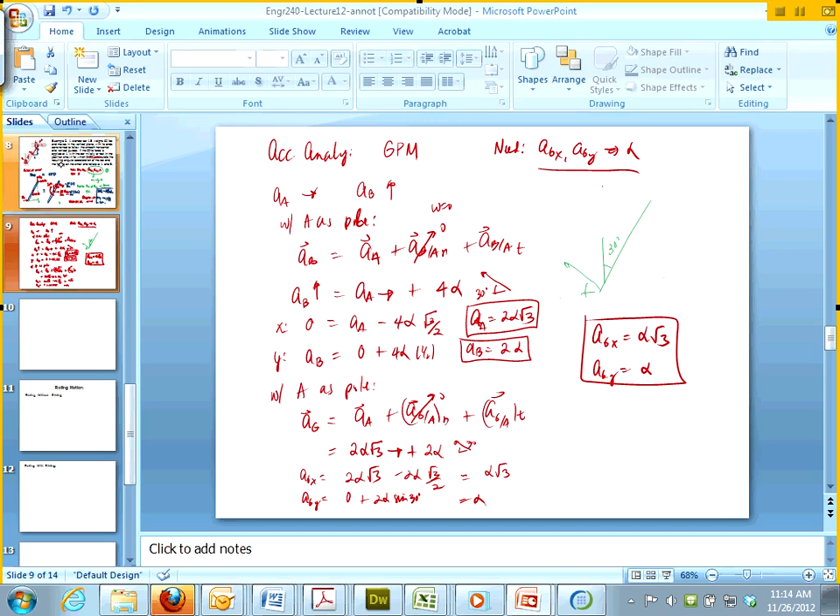Okay, let's see. So let's look at the last problem that we didn't quite finish last time. Seems like from another eon. So we had this innocent looking problem, right? A single bar in general plane motion. I don't think it can be any simpler than this. We are given its weight, that it moves in the vertical plane and its ends are constrained to follow horizontal and vertical guides. So A is constrained to move along the horizontal and B is constrained to move along

the vertical. And there's a 30-pound force that is applied at the position shown where it's initially at rest, and theta equals 30 degrees, and we're asked to calculate the resulting angular acceleration at this position due to the forces applied, as well as the forces on the small end rollers A and B. Since the problem asks us to find an acceleration, this has to be a chapter 16 problem. We look at the free body diagram and effective force diagram.

By the way, if you look at the book, the way they analyze the problems, they right away start with kinematics to either, number 1, find all the kinematic variables if you can, or number 2, reduce the number of kinematic variables by relating them to each other. I don't like doing that approach because I would like you to see first how much kinematic analysis you need in order to make the free body diagram happy. Does that make sense?

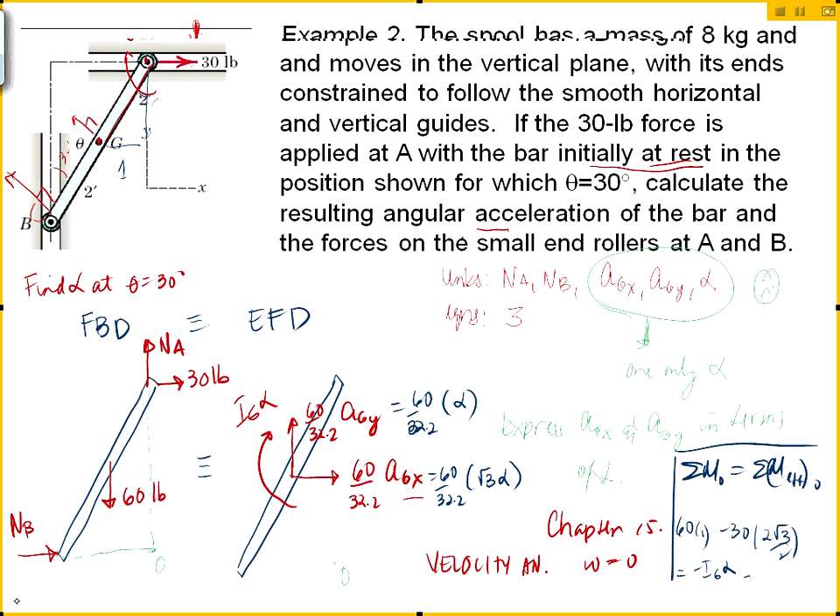Okay. In chapter 15, chapter 16, D'Alembert's principle, FBD equals EFD, is very similar to Newton's second law, but on the EFD you have 2 or 3 things, right? So here it's 2: one mass times acceleration of the center of mass, AG, and one IG alpha. It has to always be with respect to G. Is that your question? Okay. Yes, it has to be MAG. It has to be the acceleration of the center of mass, not any other point in the system. And it has to be an I relative to G multiplied by alpha. That's in case of a mass, right?

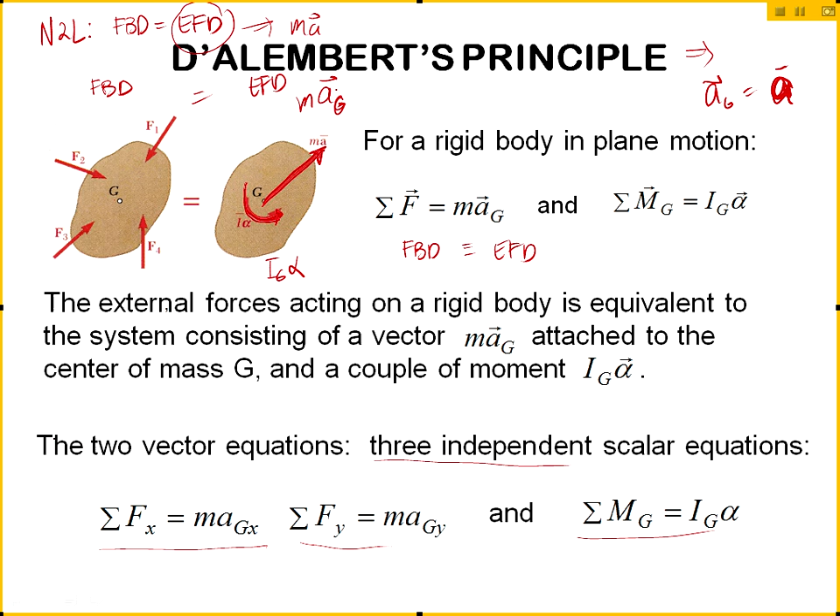No, if the center of mass is not moving, then AG is 0. Therefore, it's just an IG alpha. So if it's in centroidal rotation, meaning it's rotating about the center of mass, which means that the center of mass is not moving, which means that AG is 0. Okay, and that's one of the problems that you looked at, right? So if the object is rotating about the center of mass and it is not moving, A sub G is 0, so you're just going to have IG alpha. Okay?

Exactly. So in this example here, if you look at that pulley, the center of mass of the pulley is not moving, right? Because it's rotating about the center of mass. That's why you don't see a mass times AG for the pulley. Is that okay? But this one is actually a case when the center of mass is moving, right? G can move up. So in addition to the IG alpha, you have the mass times AG.

Here, in the problem we're looking at, the center of mass can actually move, right? Yes, G can translate, and we don't know the exact direction of its motion. It can move both along the X and the Y direction. That's why instead of showing it as AG with unknown magnitude and unknown direction, I represented AG as 2 unknown components, one along X and one along Y. Is that okay? So I'm going to have to redo the free body diagram.

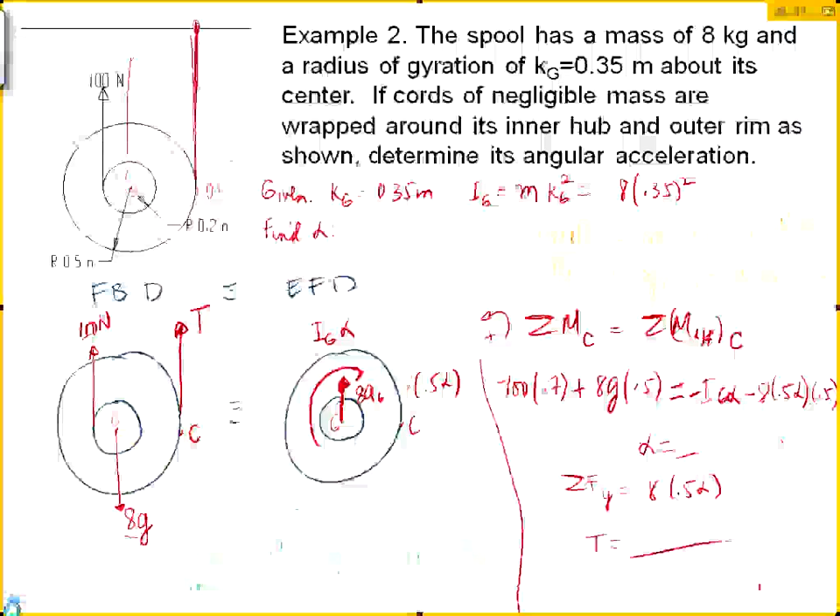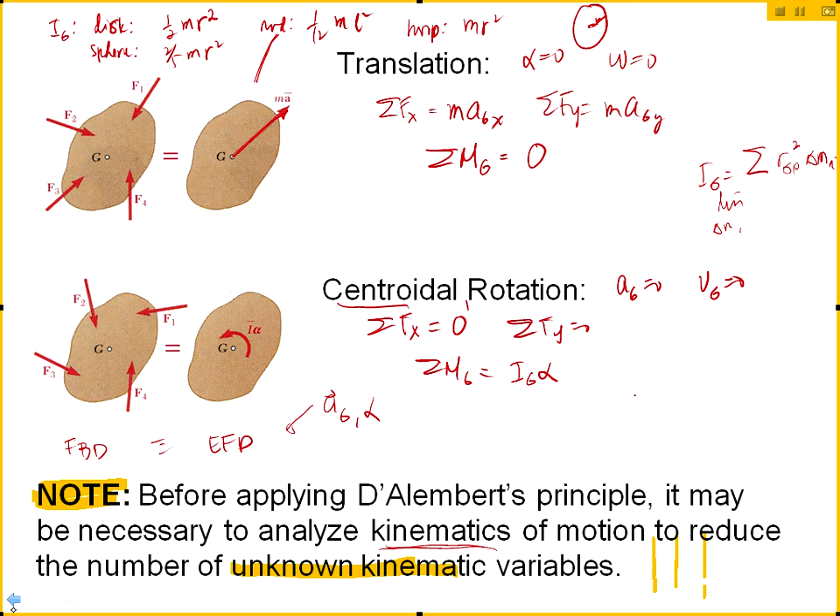This is the time to conclude that in order to make the system happy, if you remember my word of caution before, my triple exclamation point: before applying D'Alembert's principle, it may be necessary to reduce the number of unknown kinematic variables on the right side of the equation by using kinematic analysis. So you only use kinematic analysis on the acceleration side, because only accelerations are kinematic variables. The unknowns on the left side are forces, and forces are not kinematic variables.

It's not constant. What do you mean what is not constant? Here, nothing is constant. AGX is not a constant, AGY is not a constant, NA is not a constant, NB is not a constant. This entire problem is only for 30 degrees here. At some other angle, all their values will be different. The only thing that's given here is that omega is still 0. But that's going to change eventually because of the angular acceleration that we expect to be non-zero.

So of all of these 5 unknowns, the triple exclamation points suggest that what? We need to reduce the number of unknowns by kinematic analysis. The only way we can do this is by reducing the number of unknowns on the right side. So the question now is, how many kinematic variables can I afford to have on the right side in order to make this system happy? It's alpha, right? Well, I'm not solving for anything. I'm simply trying to make this system happy.

Yeah, so you relate them. Okay, but the question is, how many kinematic variables do we have here as unknowns? 3, right? These 3 are kinematic variables. So how many kinematic variables can I afford to be unknown in this system and still have a happy system?

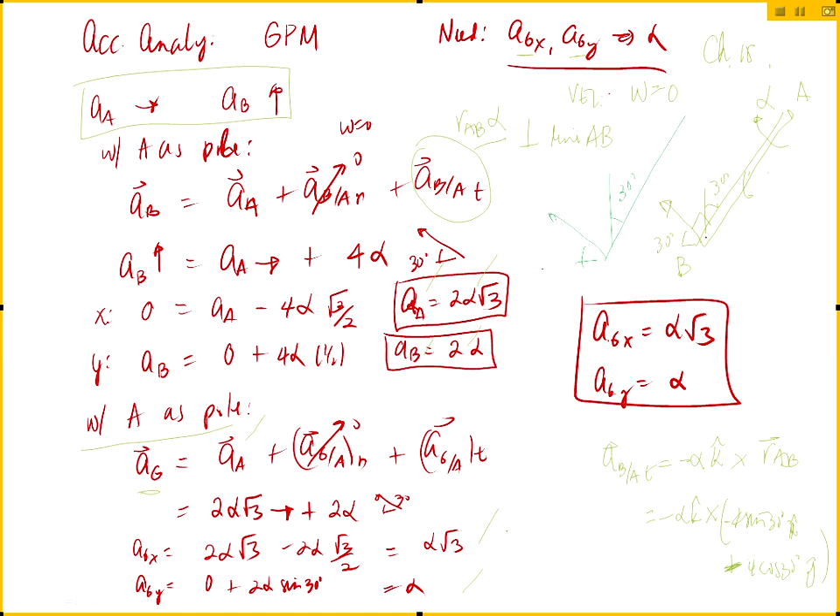Yes. So after expressing AA in terms of alpha, I now apply acceleration analysis going to G, because ultimately it's G that I'm interested in. So AG is equal to AA plus acceleration of G relative to A. The normal again is 0, and the tangential would just be what? Instead of having 4, it's just 2, right? Because you're going from A to G, and G is halfway along the length of the bar. And I do AGX and AGY, and we got these results here. AGX is positive alpha square root of 3, and AGY equals alpha. And those are the results that I'm going to substitute in here.

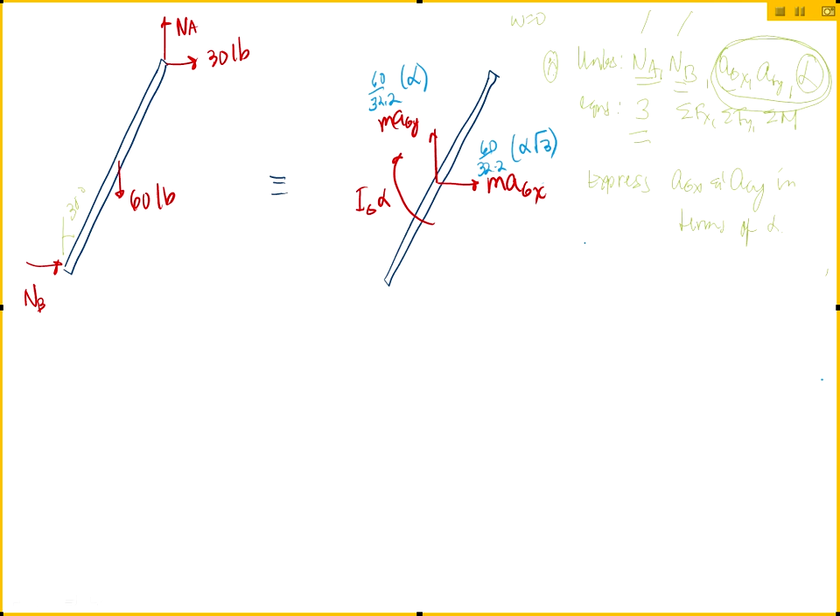Okay, so this is going to be mass. What is the mass of the bar? It's 60 over 32.2. And AGY is just numerically equal to alpha, right? And this is 60 over 32.2 again for the mass. And AGX was how much? Alpha square root of 3. So this thing now is being replaced by the blue term, which is now in terms of alpha. This is also replaced by the blue term in terms of alpha. Now, with AGX and AGY expressed in terms of alpha, this is now a happy system, right? And this is the time when I start my summation equations.

And if I remember correctly, Surush suggested, what did you suggest, Surush? Do you remember? Yes. So some of you would just go summation forces X, summation forces Y, and then summation moments about the center of mass, which is probably what the book would have done also. It's really a happy system now, 3 equations and 3 unknowns. You can set up all those 3 equations and solve them simultaneously. But it's much better if you can solve for one of them independently of the others. So if you can eliminate 2 of the 3 unknowns in an equation, use that equation.

So he was suggesting we can eliminate NA and NB simultaneously by summing up moments about the point where they intersect, because their moments about that point will be 0. So the summation of moments on the left side about point O is equal to the summation of effective moments about the same point. It's very important when you're summing moments on the left side, it has to be exactly about the same point on the right side. And does everyone understand why I sum moments about point O even though it's outside the bar?

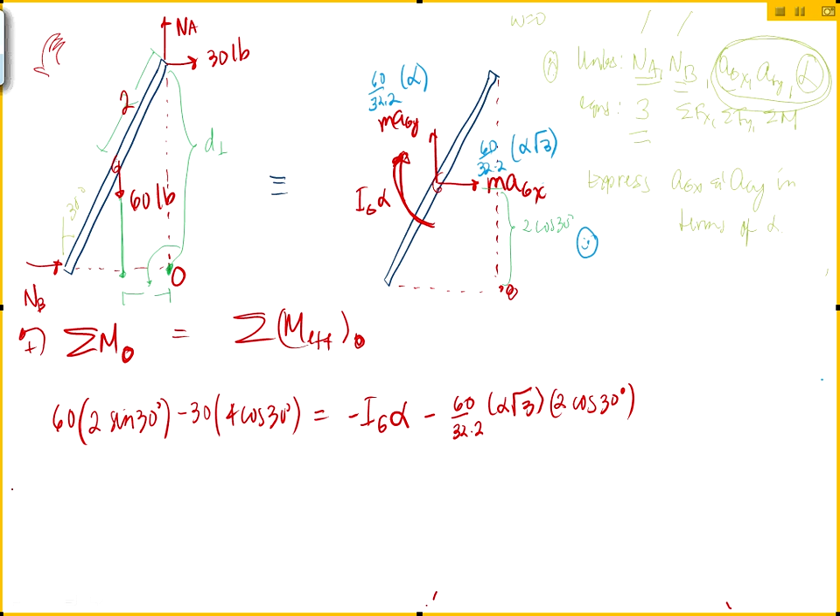And the maGy will also be minus, right? Okay, minus the effective force, 60 over 32.2 multiplied by alpha. Again, that's just the effective force. We need to turn that into a moment or a torque by multiplying that by a perpendicular distance. Which perpendicular distance would that be? 2 what? Sine 30 degrees. Everyone okay with that?

And of course, I didn't substitute it here. We should know what IG is for a slender bar. It's going to be 1 over 12 multiplied by its mass, 60 over 32.2, multiplied by the square of its length. Yes? I sub G is equal to 1 over 12 M L squared for a slender rod. And as you can see in this equation, there's only one unknown, so you can solve for alpha.

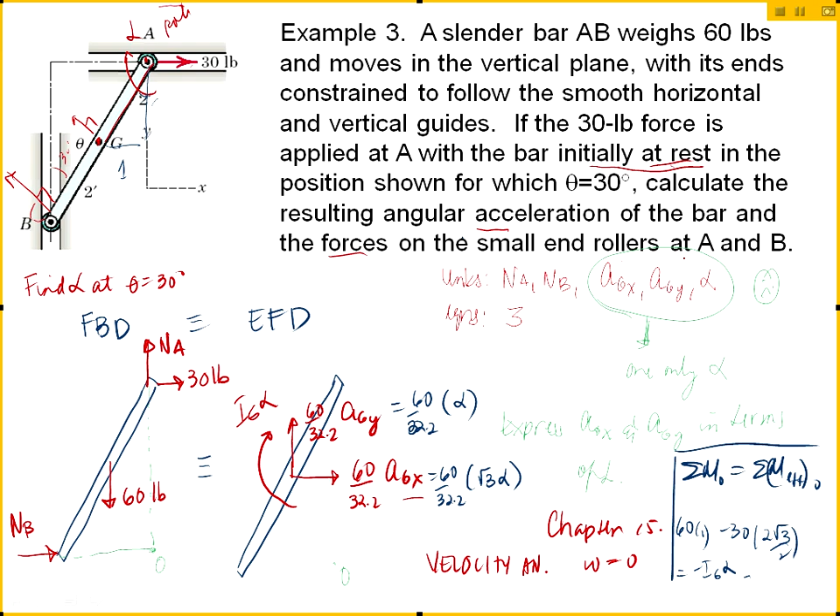Okay? Once you know alpha, we're not quite done yet because, if you remember, it's also asking us to find the forces at the rollers A and B. So we need to find NA and NB. So how would I find NA and NB?

Okay, I'm going to do summation of forces along X equals summation of effective forces along X. Okay, so let's do that. What are the forces along X? NB is one of them, plus 30. Must be equal to, those are the only two forces, right? Must be equal to, on the right side, what's the only effective force? It's just the m a_Gx, right? 60 over 32.2 multiplied by alpha square root of 3. But this guy here is already known, right? Which means that this summation of forces along X will actually lead us to finding NB.

Okay? Similarly, we want to find NA, we sum forces along Y equals the summation of effective forces along Y. Y forces, we're going to have an NA going upward, 60 going downwards, so it's a minus 60. And on the right side, the only effective force is the m a_Gy, 60 over 32.2 multiplied by alpha. We already know alpha, which means that we'll be able to solve for it. 60 is vertical. Okay?

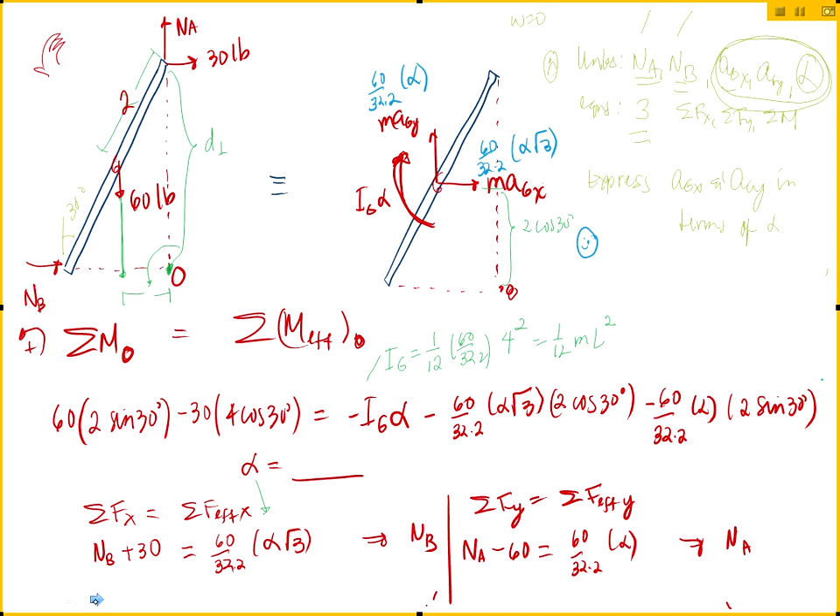Rolling motion. I think there's a similar problem on the homework, but rolling motion is really a special kind of general plane motion. If you are rolling without sliding, what's the relationship between velocity and angular velocity? So if I have an object, and the center of mass is G, and if it's rolling about a stationary ground, the velocity of the ground is 0, so the velocity of the point of tangency is 0. If it's not sliding relative to the ground and the ground's not moving, the velocity of G would just be R, radius of the disk, multiplied by omega. In this case, it's going to be horizontal.

All right. Similarly, what can you say about the acceleration of G? We will just differentiate both sides of the equation. It will just be R alpha, and to the right, if I'm assuming that omega is clockwise. So when it's rolling without sliding, you have an exact relationship between the linear acceleration of the center of mass and the angular acceleration, assuming that it's rolling along a horizontal surface.

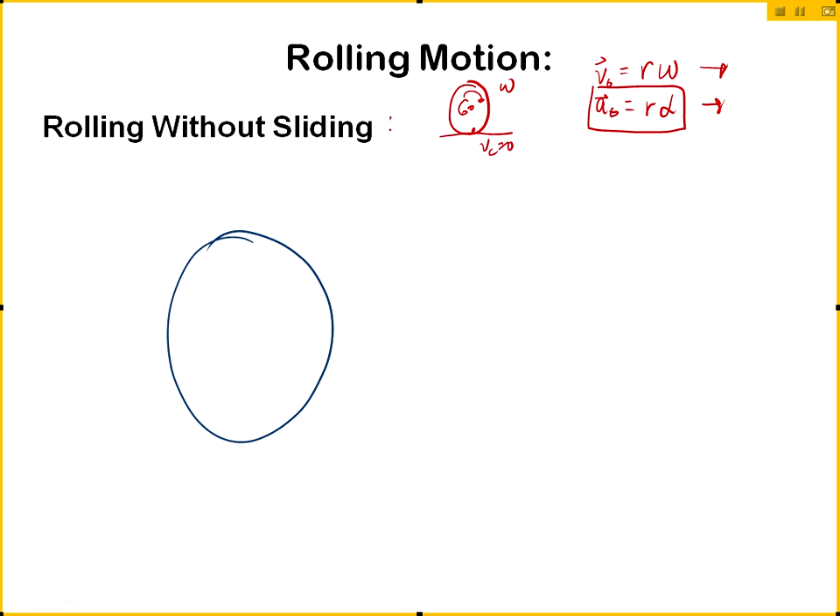So let's look at an example. Let's say that I have this yo-yo. I actually have the yo-yo with me. And let's say I pull it with a force P. Okay, so I have 3 yo-yos here. My hamburger yo-yos. So it's being pulled to the right, like this. So my question is, where is the yo-yo going? What is the resulting angular acceleration of the yo-yo? Clockwise or counterclockwise?

What is the resulting angular acceleration of the yo-yo? Clockwise or counterclockwise? How many of you say it's counterclockwise? Yeah, there's friction. How many of you say it's counterclockwise? Raise your hand. How many say it's clockwise? Nobody wants to say anything. So, by show of hands, counterclockwise is the more popular answer, right? So, the answer is clockwise. Okay.

It's not clockwise. Well, depending on you. What? What have you got to say? It's just clockwise or counterclockwise, right? Isn't that clockwise? What about when it rolls over there? But it doesn't roll over there. You just say it doesn't. So what happened? Why did you think that it's counterclockwise? You agreed with Sarush. Okay, let's blame it on Sarush. It's clearly clockwise, right? I'm not tricking you. Do you want to try? So what happened? It's not a trick.

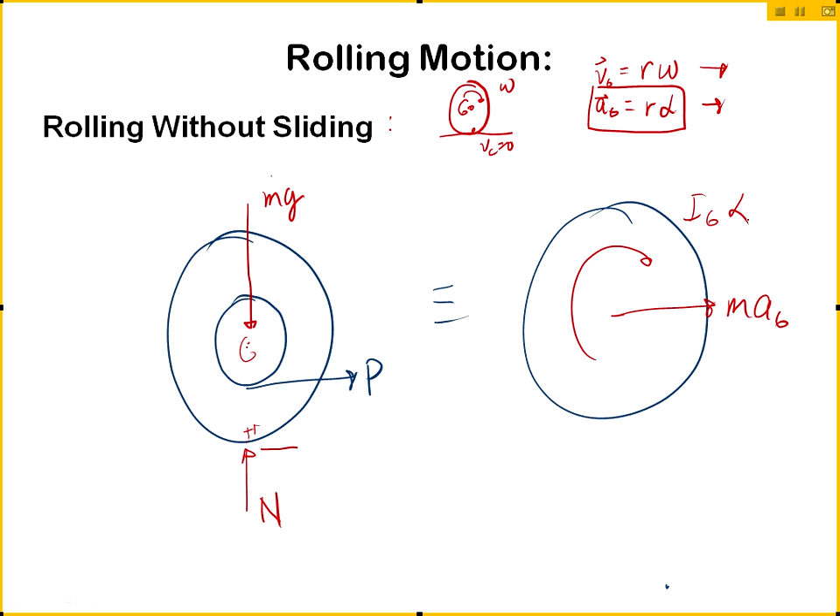We already said that the alpha is clockwise, right? And Ag is to the right. Do you agree with my right side? Yes? That I'm confident, right? That the center of mass accelerates to the right and also rotates clockwise. So this one I've established, okay? This one here, I still have a question mark. Why?

What we're concerned with is not the motion of the center of mass of the yo-yo. I agree with you, the center of mass moves to the right. But then the whole thing moves to the right? Not necessarily, because as it's moving to the right, it's also spinning clockwise. As it spins clockwise, the bottom part actually slides to the left relative to the ground, you agree? Yes? Do you see that?

If I take my fingers off, okay, so it's moving clockwise. If you focus on the spinning clockwise, isn't the friction the other way? You agree it's spinning clockwise, right? What's the direction of friction here? Left or right? No, it's right. Because this thing here is sliding to the left relative to the ground.

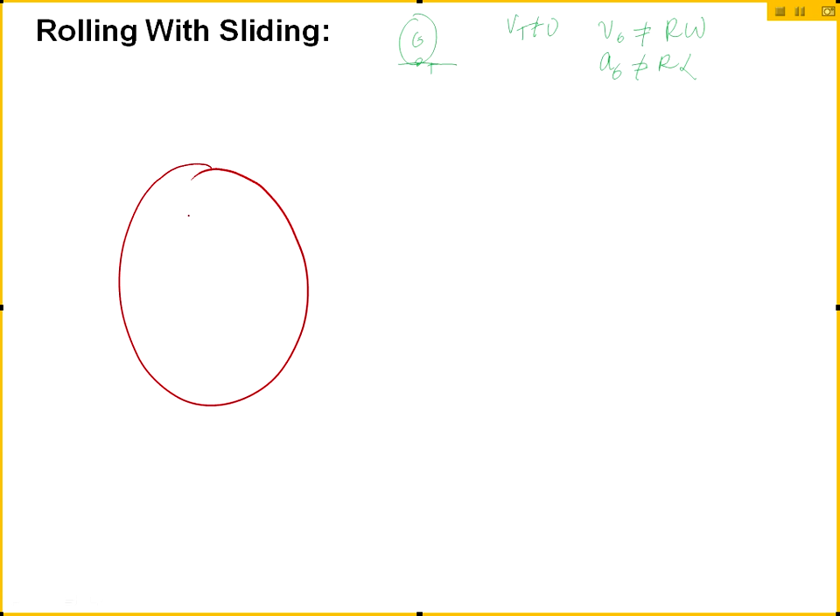Okay? So let's look at the scenario. If we have the same yo-yo, and I'm still pulling it to the right with some force P, what's going to happen now? If it's rolling with sliding, that means I'm really yanking it with a big P. If it's a small P, it doesn't slide. So what happens now? Forces acting would still be mg here. There would still be a normal force here, and there would still be friction here.

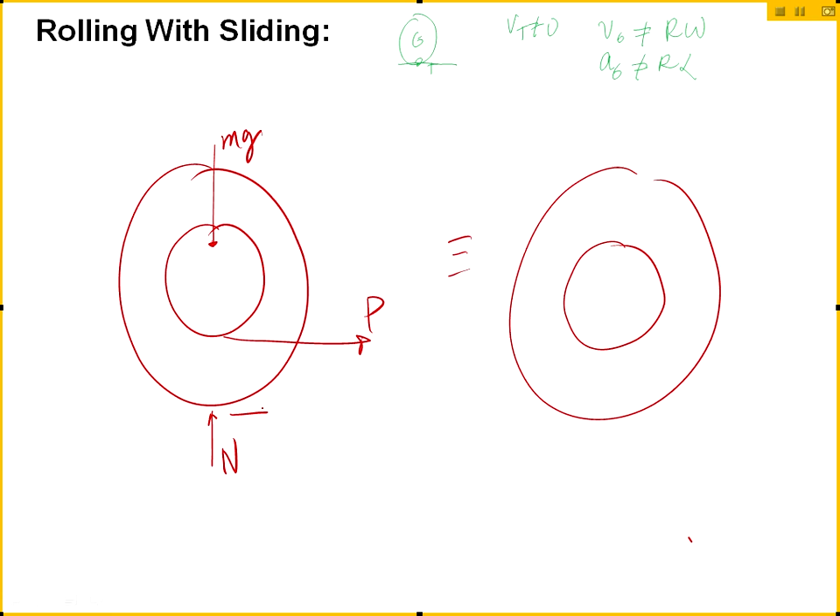On the left side will be N. The F I will not count as an additional unknown because, although I don't know the direction at this point, that friction is going to be exactly equal to mu K N, because it's sliding. So there's only one unknown force, N, because knowing N amounts to knowing F. So we still have three unknowns in three equations. It's still a happy system.

What is the complication here? We have to establish the direction of friction. Can we say positive? You cannot assume anymore. Why? Because F is not going to be determined from a summation equation. The exact equation you're going to use is that mu K N equals F. And this equation does not give any direction. And unlike the previous one, how did we find F? It's from a summation equation.

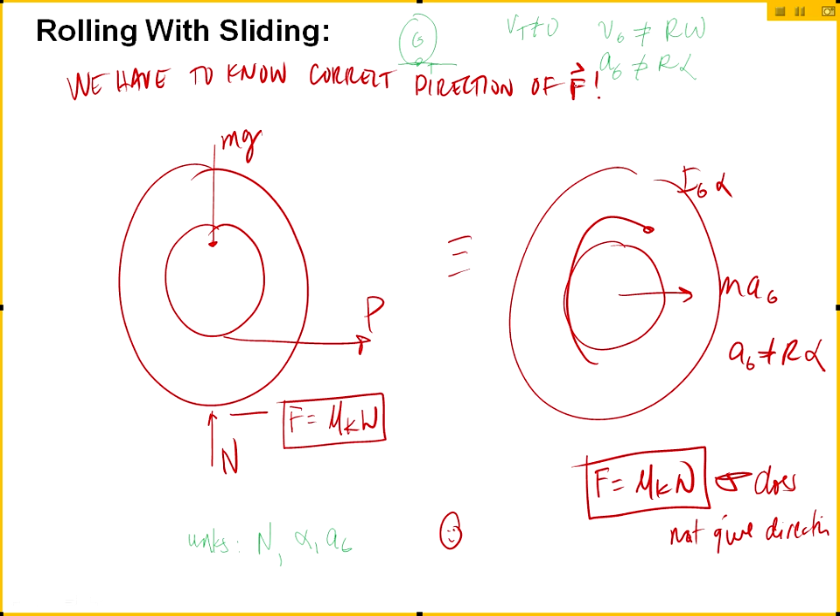And how do we do that? Flip the coin? You have a 50% chance of being right or being wrong. Do we do what Ben was doing earlier? Sometimes it works, sometimes it doesn't. Right? I think this is what he was doing in his mind. He was summing moments about point G.

If you look at the summation about point G, there's nothing from N, nothing from MG, positive for P. This one I don't know. When I go to the right side, there's nothing from MAG, but it's negative from IG alpha. The positive moment here cannot equal the net negative moment here unless this friction is providing the negative moment. So he was doing this in his head, I think.

Summation of moments about point G. He was saying, okay, nothing from MG, nothing from N, and the P, it's going to be P times small r, and it's going to be positive. Do you agree? And then for F, we don't know, right? But it's going to be plus or minus Fr. It must be equal to, on the right side, there's no moment from MAG. The only moment is actually a minus.

In this case, we're summing moments about point G, right? And therefore, the only way for this equation to be true is if it's this one, because a positive plus a positive can never equal a negative. That's why he was saying that the friction must be the one responsible for rotating it clockwise. Therefore, this one is to the left. So it worked for this, but it didn't quite work when the P was above, right?

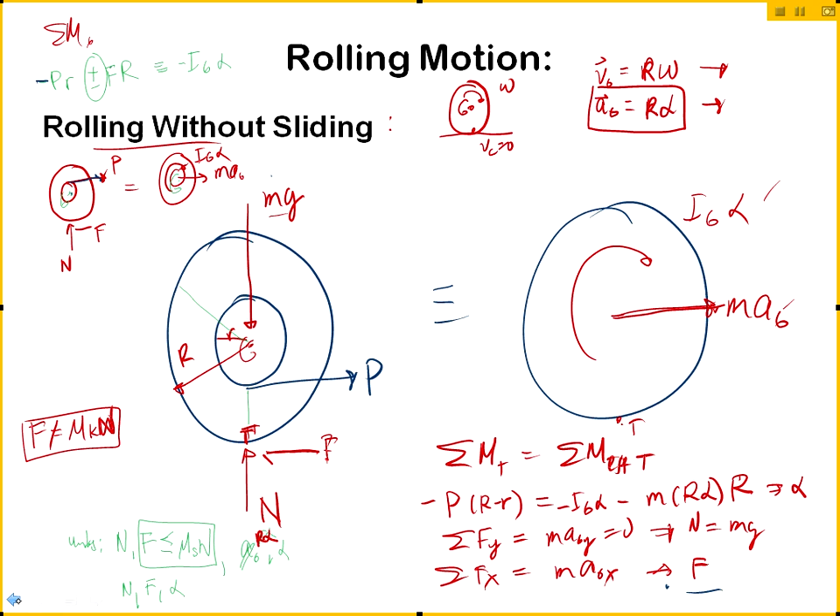Okay, unlike in the previous one, F was determined as an unknown from a summation equation, and a summation equation will give you the correct direction. So any suggestions on how to establish the correct direction of friction here? Yes. I was trying to solve moments about the point tangent to... If I do that, I will have AG and alpha coming in, right? On the right side, AG.

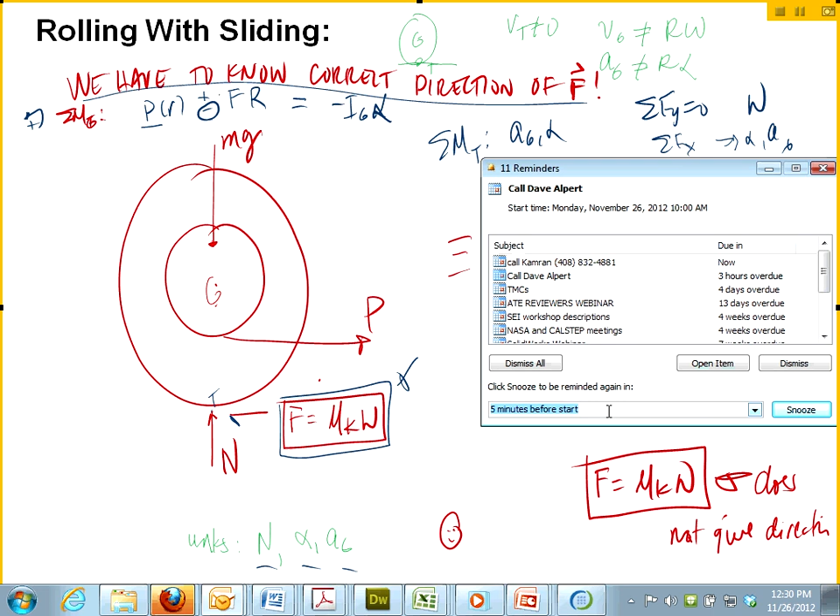Yes. So friction is really there in order to prevent sliding. The only difference between rolling only and rolling and sliding is during rolling only, friction was actually successfully doing its job, to apply a force in a certain direction to prevent it from sliding. But even when it's no longer successful, it should still be doing a similar job, which means that the direction of friction would still be what it was during rolling. Okay?

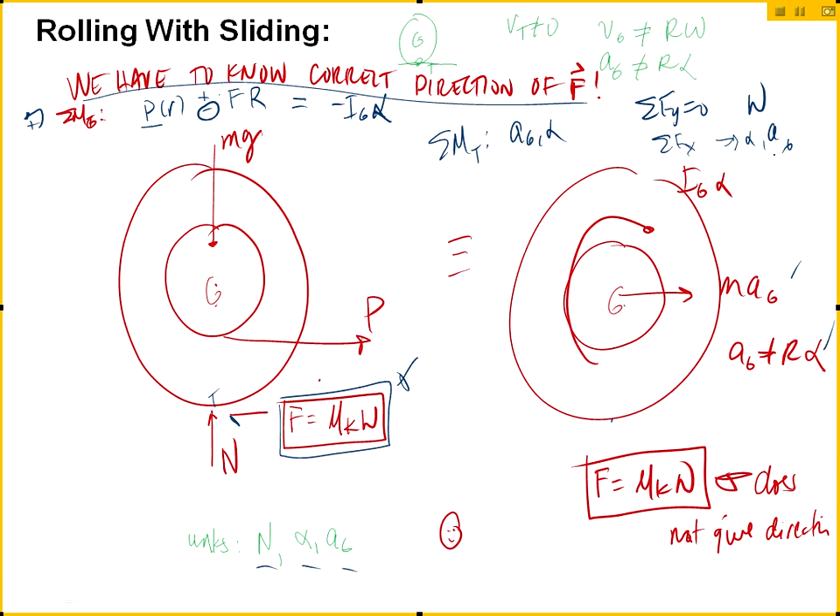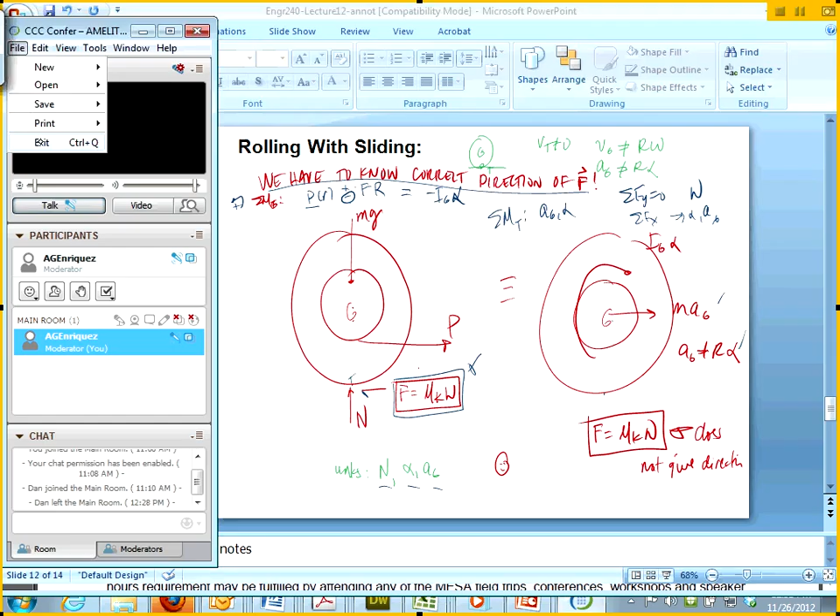Let's stop. I think we spent too much time here. Professor, do you have a meeting right now? I have a meeting, yes, for 30 minutes. I need 10 minutes with you in private. Okay. I'll be in the computer room finishing my homework. Okay. Don't forget to...